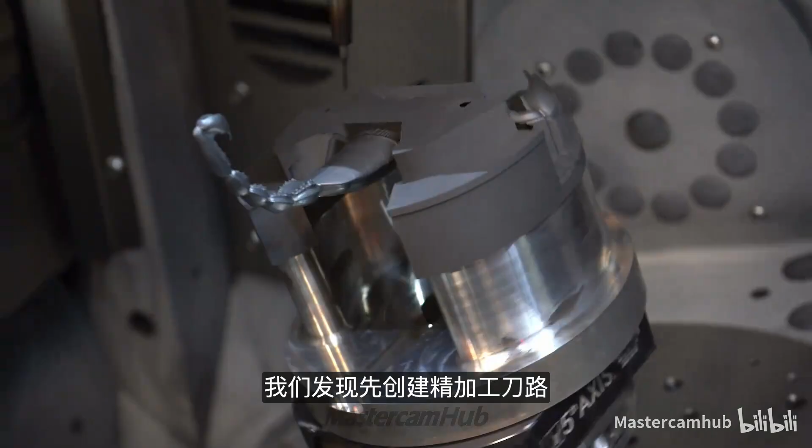So the first thing we did with the Scorpion when we programmed this was actually program the finish operations. In this case, the geometry was so complicated, we found it better to create finish motion and then add the roughing to make the finish motion possible.

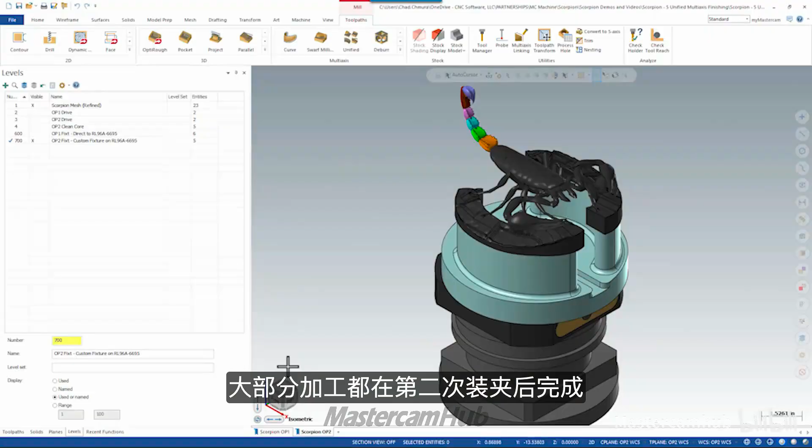So we have two setups in this part. We have Op1, where we have the full cylindrical blank mounted to a RockLock base, and then Op2, where we have the bottom finished, we mount it to a custom fixture and stand the part up. The majority of the work happens in Op2, but the tail specifically was split between Op1 and Op2.

So we needed to kind of find a method that worked for both sides of the tail that was pretty uniform. In this case, all made possible by the unified multi-axis toolpath and the fact that this was a mesh body. Programming to a mesh actually made this a little bit easier, in my opinion, than if this were a solid body, and I'll show you why.

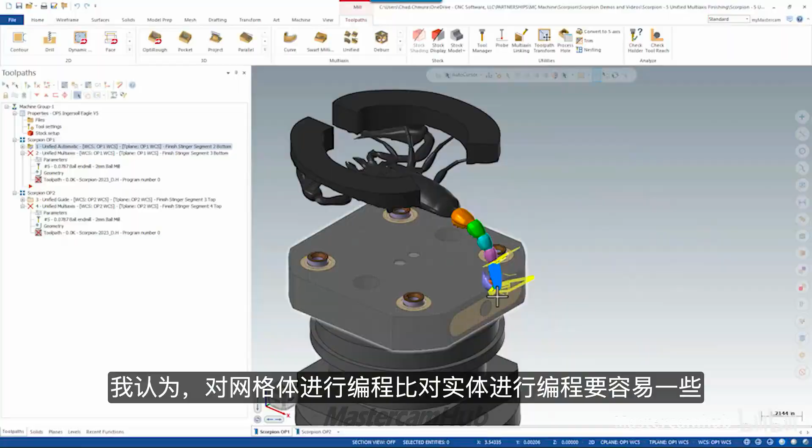So we can see there are already toolpaths existing in this file. We have one of the Op1 segments done, and this is something we're just going to kind of continue along the other segments. So here's a blank multi-axis toolpath for segment number 3. If I open the parameters, this is just a fully blank unified multi-axis toolpath, so we're starting from scratch here.

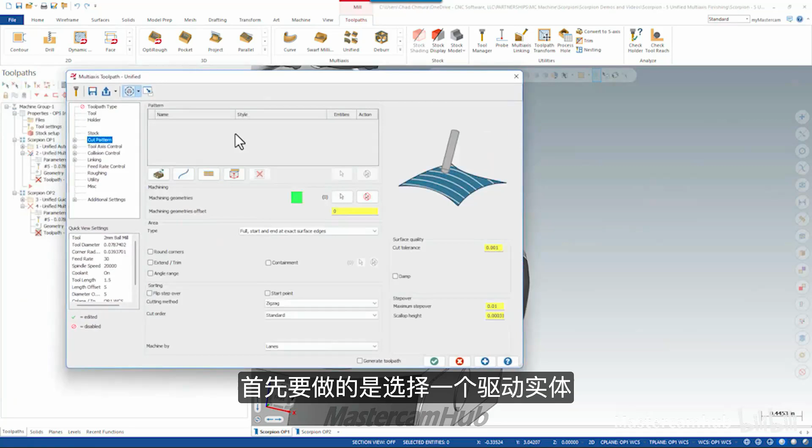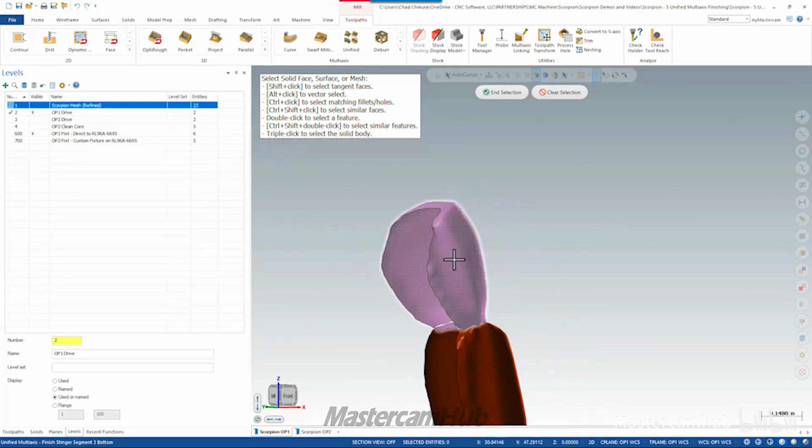What I need to first do is select a drive body. So let's select machining geometries here. And I'll open up level 2 where our Op1 drive surfaces live. And you'll see this is actually a trimmed up version of those full segment meshes. We can see here, there's the full mesh. This is just a trimmed kind of a half body of the tail segments.

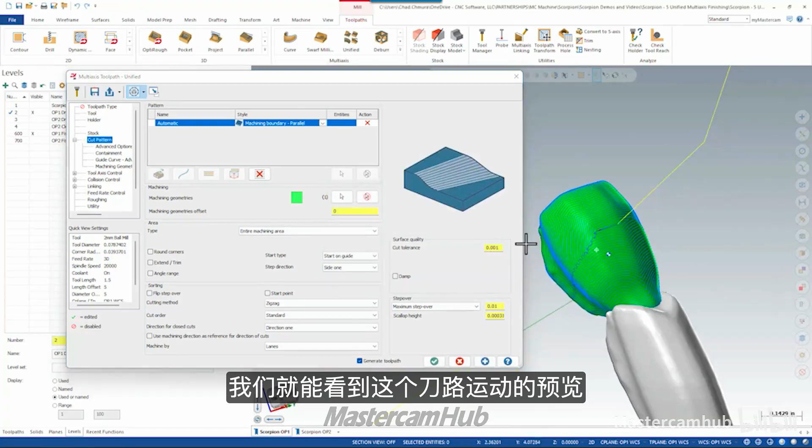Okay, and the next step is to select a cut pattern. In this case, we'll just go with automatic. What I like to do at this point is basically immediately see a preview of the toolpath. So let's turn on Generate Toolpath and click Apply. And we see a preview of this tool motion.

What we're looking for here is that the toolpath structure itself, those blue lines that show the path of the tool, we want to see that looking nice. And in this case, they look pretty good right off the bat. If I were to open this in backplot, we would see this toolpath is far from finished.

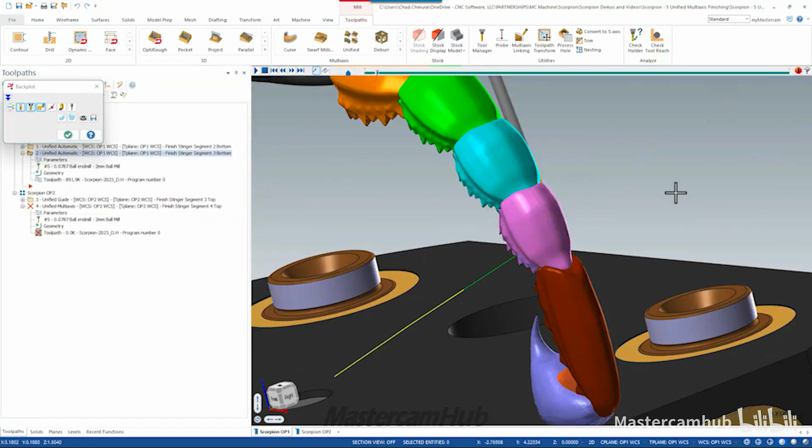You know, I can drag the tool along the toolpath here, and we see all sorts of collisions, a lot more motion than what we need. Once we get toward the second half of this body, things clean up pretty nice, but the first half is needing a lot of work.

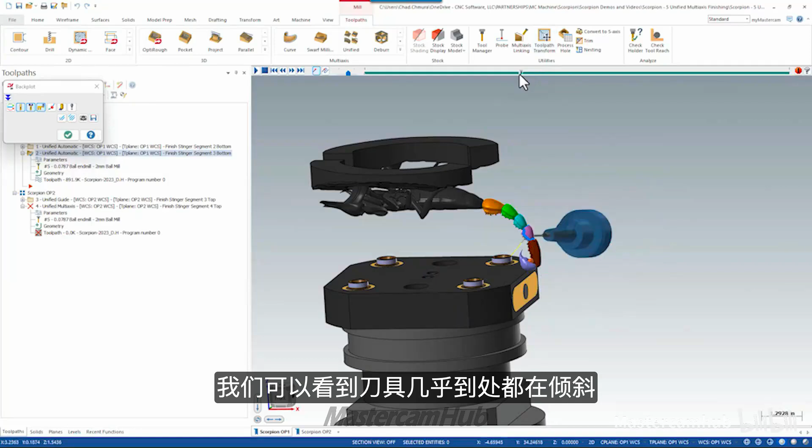The first thing I want to focus on is limiting the tilt motion that we see here. We can see the tool is tilting really everywhere, but specifically, I don't want this tool to tilt toward the left at all here. I want to draw a 45-degree line here and keep the tool to the right side of it. So if I go to our tool axis control page, I can turn on limits.

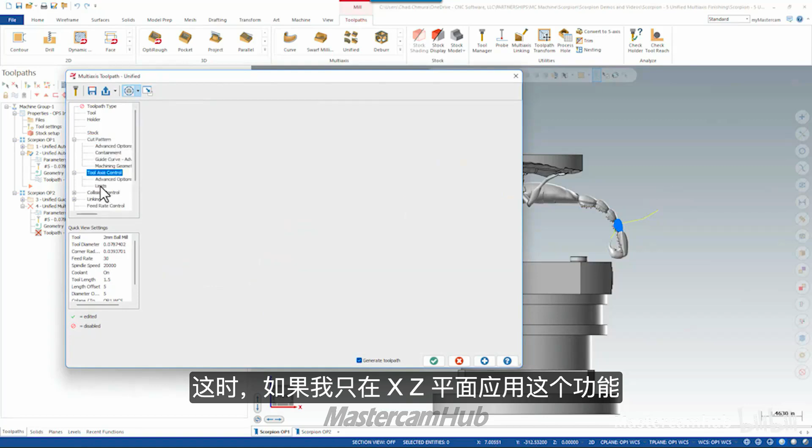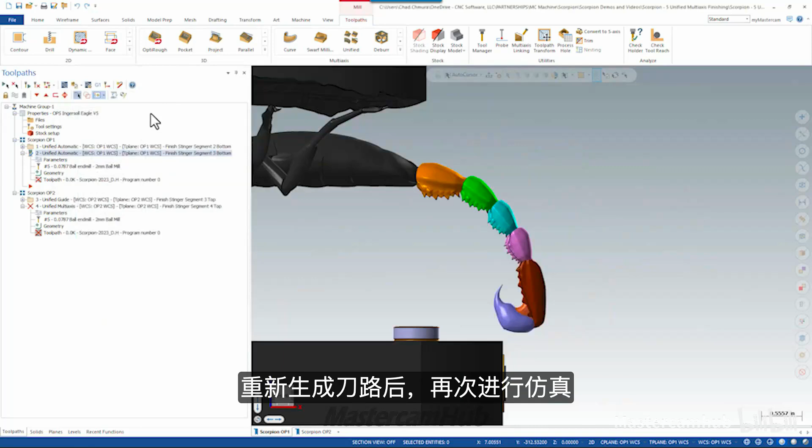In this case, if I just apply a limit in the XZ plane, so notice the X direction and the Z direction, I want to let my tool go from 0 degrees, which is 3 o'clock, to 45 degrees, so 45 degrees from that 0, and let's just click OK. With that toolpath regenerated, we can backplot once more, and we can see this motion looks much, much better. In fact, the tool is always in a safe place, except for when it's violating the neighboring tail segments.

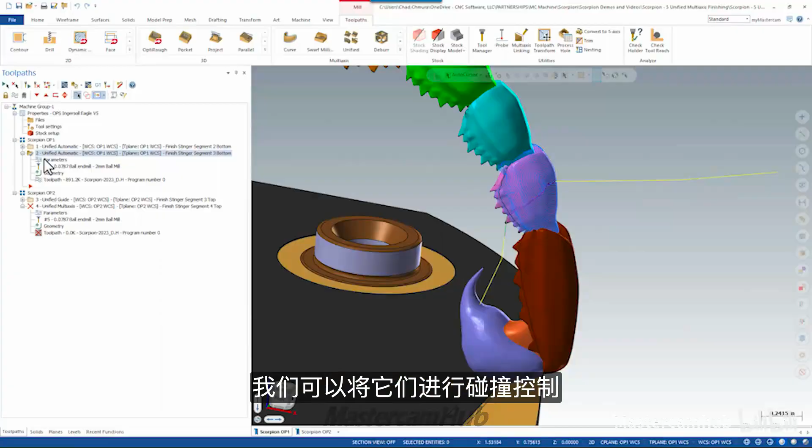And this is where making this on a mesh really helped us out, because each of these bodies is an individual body that we can use for collision control. So let's activate some collision checking. On the collision control tab, I want to check my flutes against the neighboring bodies. So we'll turn on avoidance geometry and select the full bodies.

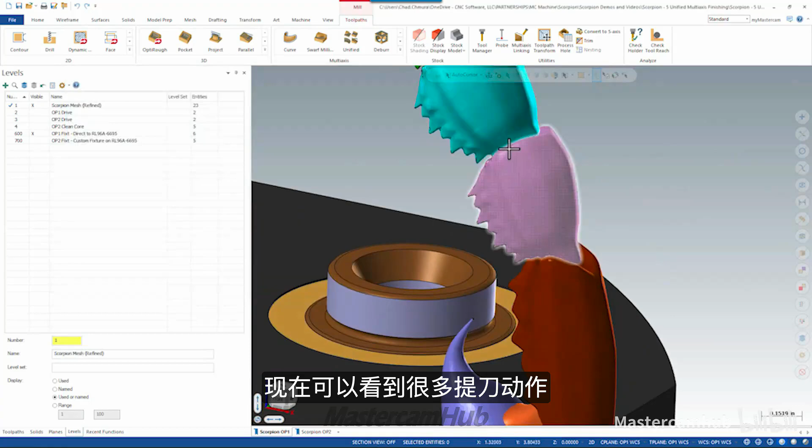So let's turn off level 2, select this and this. I want to trim those collisions out completely. Say OK. And we'll see a lot of retracts maybe now, but we now know that tool is safely not colliding with the neighboring tail segments. There is still one problem though.

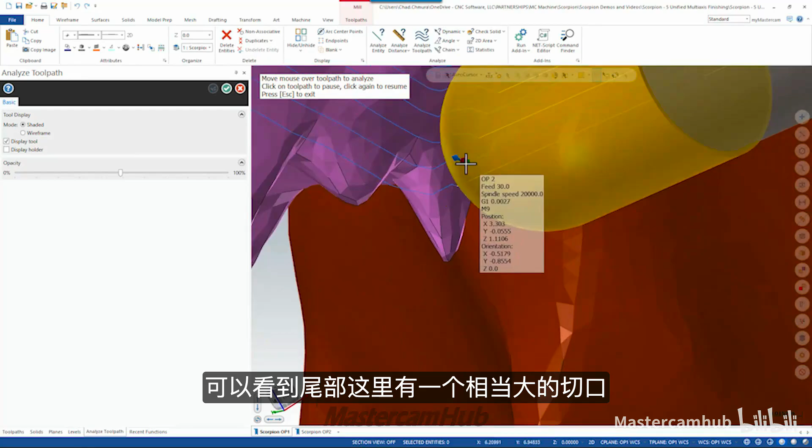Because we created this toolpath against a small version of that tail, if I run Analyze Toolpath and show somewhere around here, we actually see that there is a sizable gouge into the tail body here. And that's because we never told Mastercam that this full tail body exists. Right now, Mastercam thinks it is safely missing the drive surface, when actually it's gouging the real body. So what I need to do here is add one more level of collision checking.

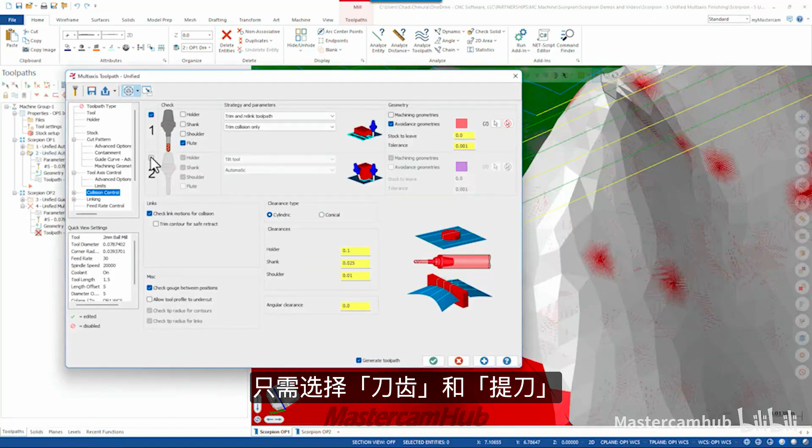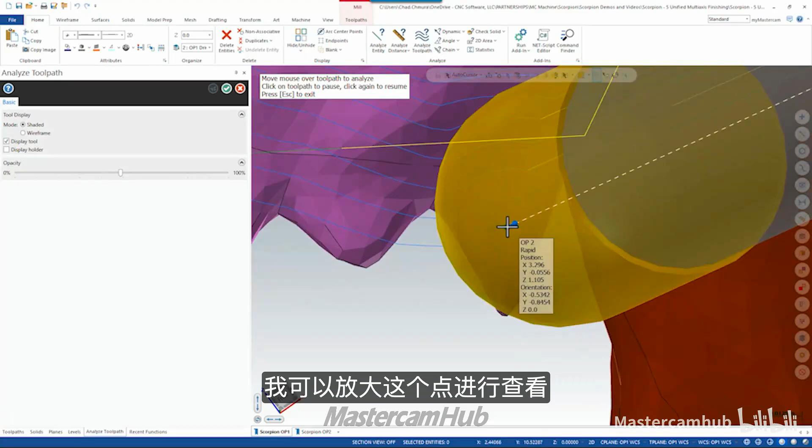In this case, it's just going to be a simple flute-only retract tool against the full body here, with no stock to leave. If I say OK, so now with that generated, if I open Analyze Toolpath once more, I can zoom into that same point and see that we are no longer gouging against the full tail segment.

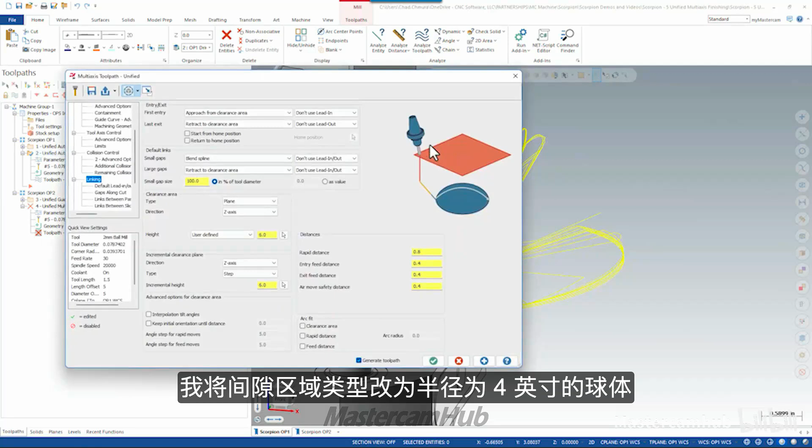From this point, there's just some standard multi-axis cleanup work to do. Clean up the retracts, clean up some of the links. So if I open the parameters, I can add some final multi-axis cleanup items. For example, I changed my clearance area to a sphere with a radius of 4 inches. I tightened up my retract distances just to kind of cut down on some wasted motion.

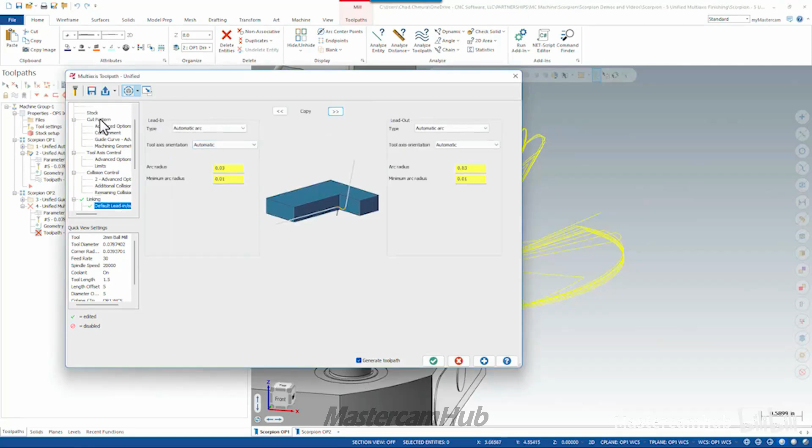I added lead-ins and lead-outs to the first and last move. And I got rid of the blend spline just to keep the motion a little bit tighter. I also want to make my lead-in and lead-out move a little bit smaller than what the default values are. And now if I click OK, we can see what our final result is.

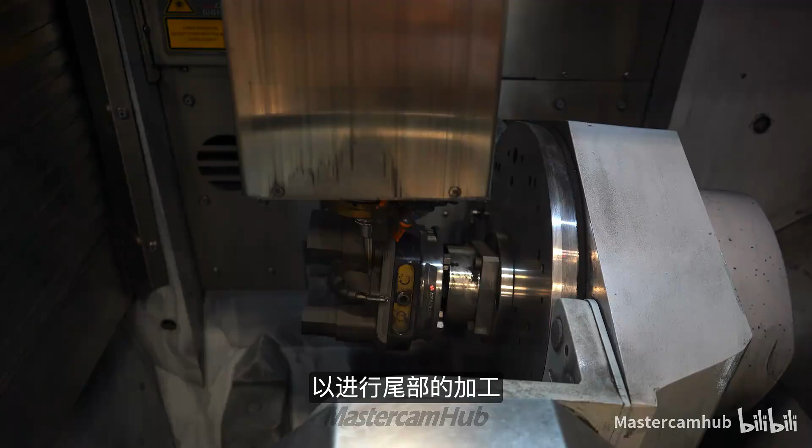So we have something that's nice and tight to the part. All the retracts are nice and safe. And as I run this through backplot, we have a really good multi-axis toolpath to finish this side of the tail. So that's the first side of the tail done.

Now in the second setup, we flip the part over and come back with a unified multi-axis toolpath, except this time we ended up using a clean core method to finish this part. If you're not familiar with what the clean core method is, it's the use of a clean surface body as your drive surface and collision checking against the actual bodies.

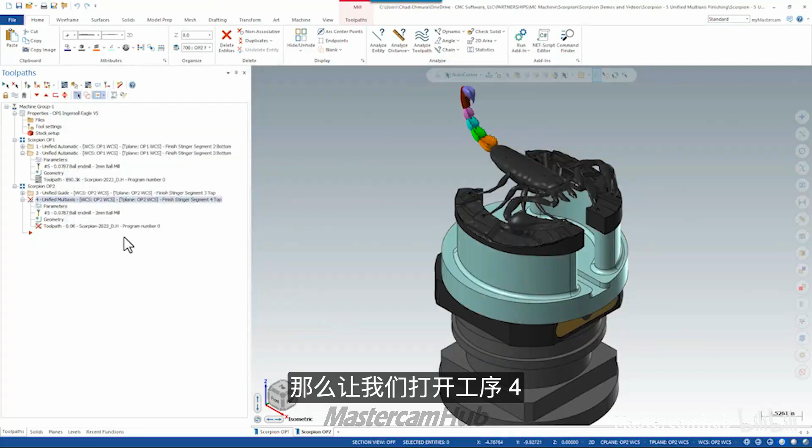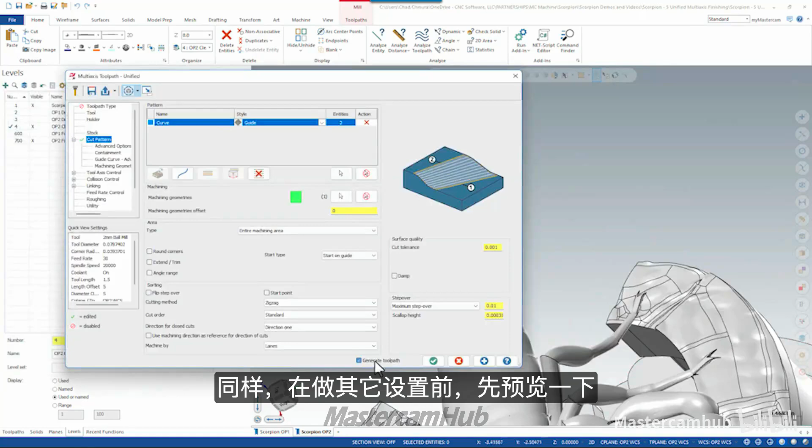So let's open up Op4. Same thing, this is a unified toolpath that's completely blank. We need to select our machining geometry. That machining geometry lives on level 4. This is the nice clean core surface we created. And in this case, we actually used the guide curve method. So let's select 1 and then 2. And again, let's just preview this before we do anything else.

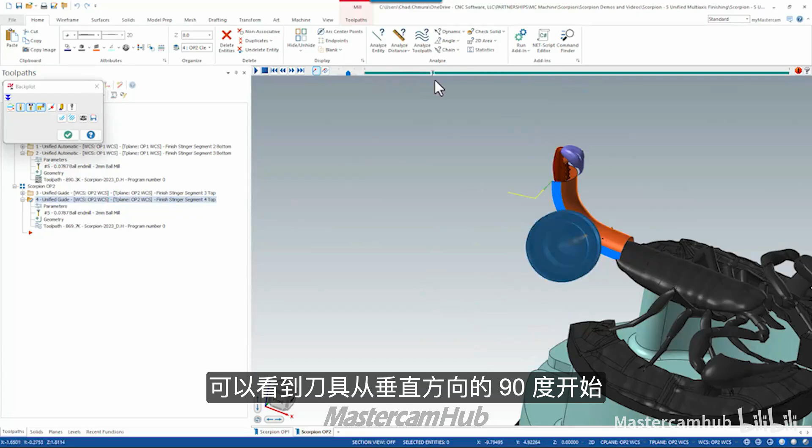And we can see the motion that we get is some nice linear motion that follows the flow of the tail lengthwise. However, it's only directed to the surface rather than to the tail itself. Let's run this through backplot so we can see the tool motion. We can see the tool starts out at 90 degrees relative to the vertical and is always staying normal to the surface. You can see there's a lot of motion here. We don't really need the tool to be doing so much tilting.

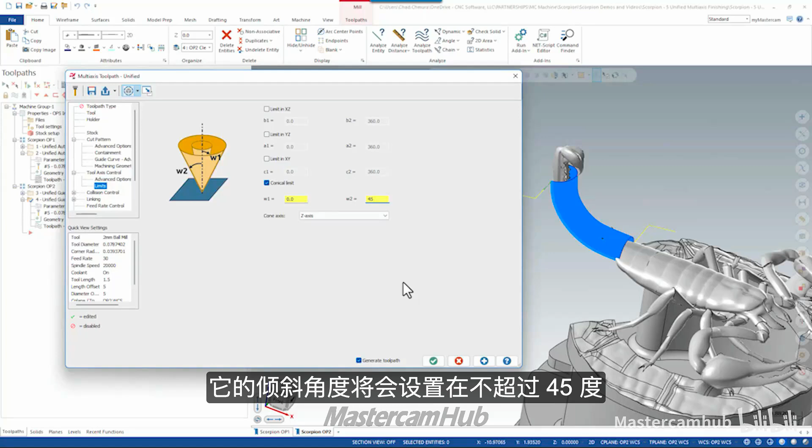So in this case, let's add another limit to our multi-axis tool axis control, except this time, let's go with the conical limit. Because we're on a trunnion style machine, this conical limit will serve as a B-axis tilt limit. So anytime this B-axis moves, I want to tell it never tilt more than 45 degrees. Let's say OK and check this out in backplot.

Now this tool is staying locked at 45 degrees of B tilt, and then the C-axis will spin around. We never let it stand up more than 45 degrees, and the same thing on the other side. So we really cut down a lot of wasted motion just by adding a tool axis limit.

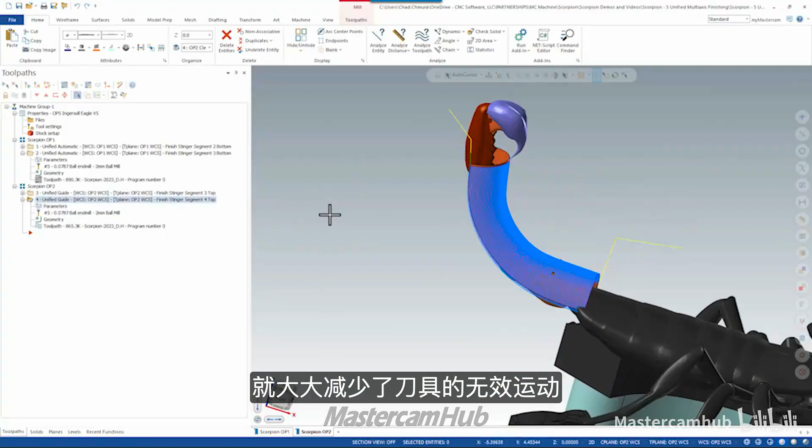Of course, this is not a finished toolpath by any means because we're not actually machining the surfaces that we're targeting. So let's turn off the level with the clean core surface and turn on the level with the drive surfaces. In this case, we're going to use collision control to drop the tool onto these surfaces. So we're going to be working on the blue part here.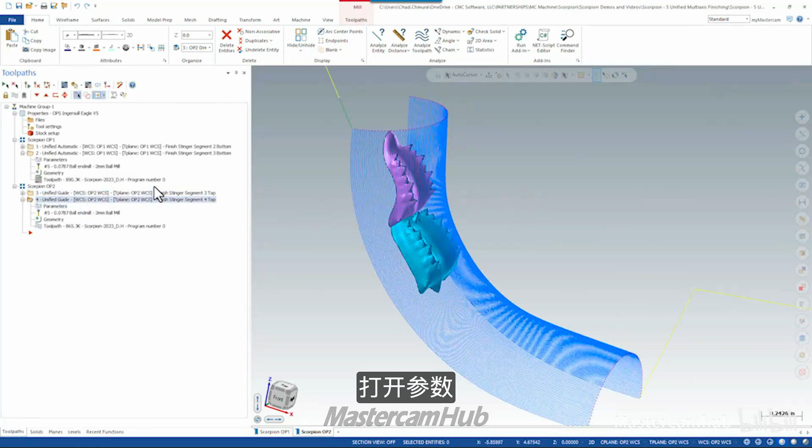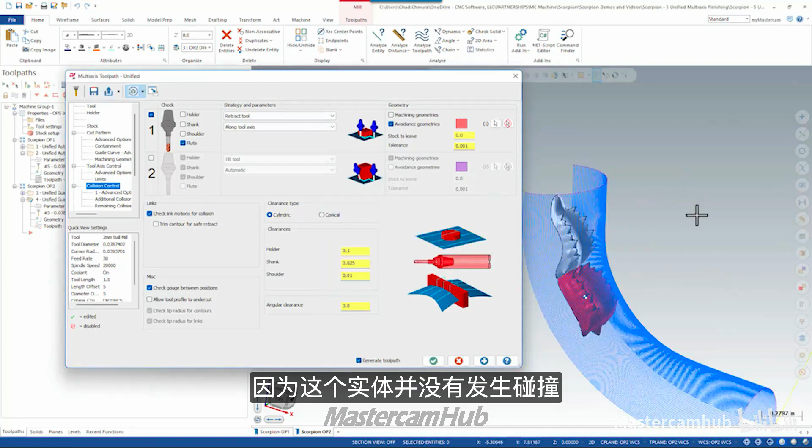So let's open up the parameters, and under collision control, we want to use the flute to retract the tool to a specific avoidance geometry. If I say OK and preview this, nothing's going to change because there are never any collisions with this body. What we need to do is come down here and activate drop down tool. If we turn that on, the tool will drop down along its axis anytime it will possibly contact this surface.

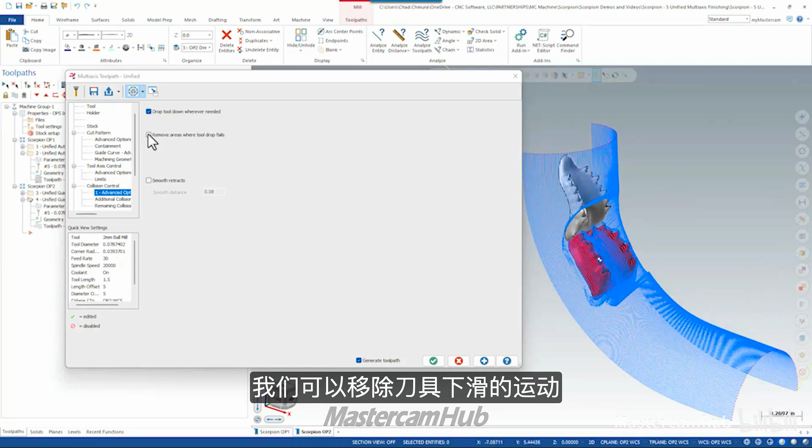However, that leaves all this area out here of wasted motion that's not actually machining anything. So what we can do in this case is remove the areas where the tool drop fails. And now we're left with a really nice trimmed up toolpath. Again, made possible by the fact that this is a mesh body. We trimmed up that mesh body, which actually worked as a containment boundary for this multi-axis toolpath.

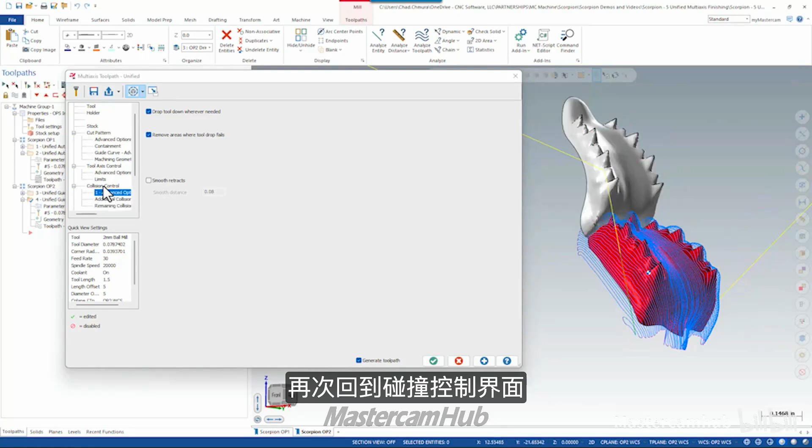We can see, however, there are still collisions with the neighboring segments. So let's go back into collision control one more time and just do a simple flute where we trim and relink to the neighboring full tail segments. We don't want to collide with this one, and we don't want to collide with that one. If we preview that, we'll see the toolpath trims up nicely.

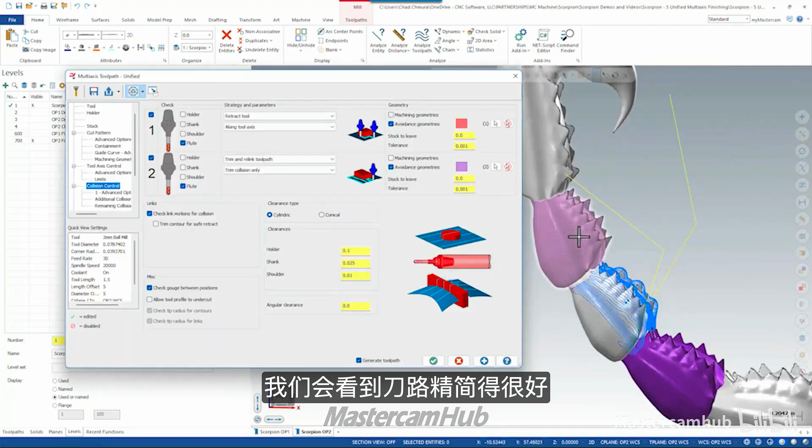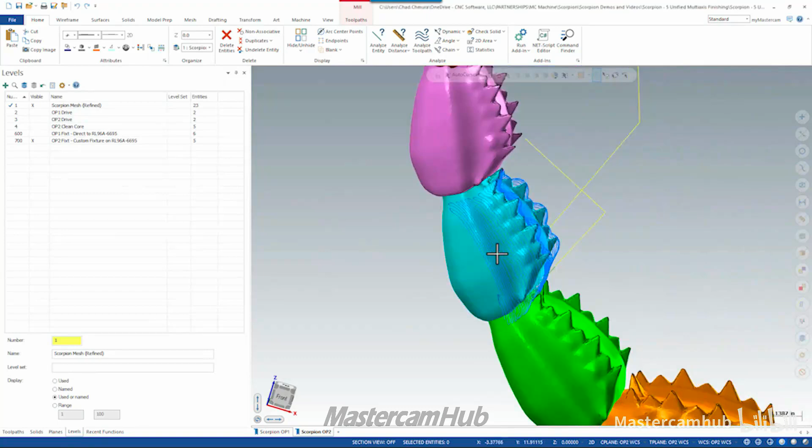But again, we only drove the tool to the trimmed version of this segment. So we need to add one more collision check that says retract the tool away from this full body because we will have some collisions down here. Say OK. We should see that this area kind of lifts up a little bit. And now we have no collisions with our drive surface or with our neighboring tail segments.

There's only one retract at the very end of this toolpath, so there's really nothing to clean up there. And at this point, this is just a matter of repeating the same process for all the tail segments, and that's how we program this entire tail of the Scorpion.